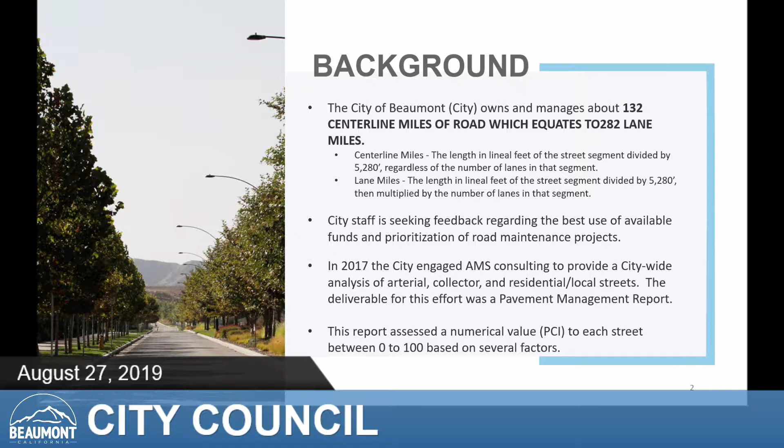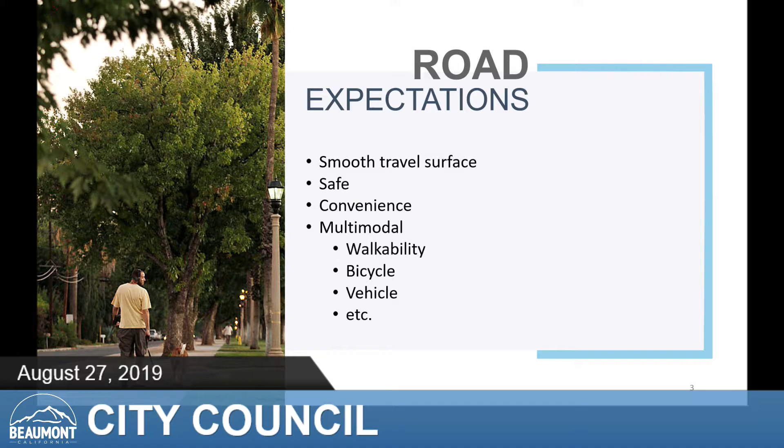So road expectations - what are our expectations? Typically they're for a smooth traveled surface, they're safe, they're convenient, and more these days they're multimodal, meaning they're not just for vehicular traffic, but encompass walkability, bicycling, public transit, and several other items.

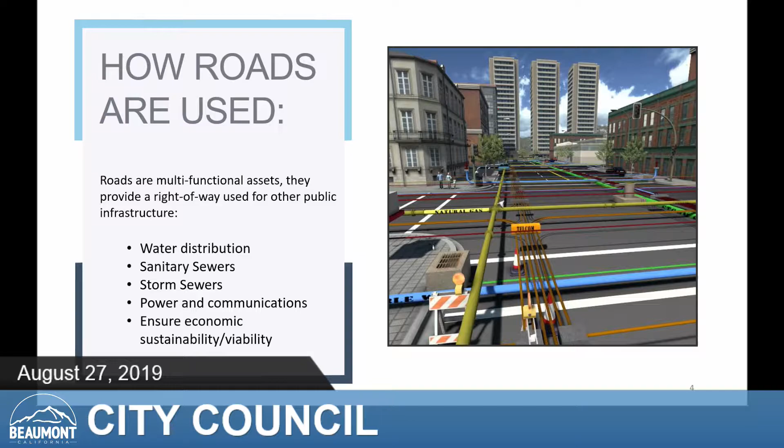as far as the analysis for the pavement management, they identified, based on each road segment, how they're quantified in the tabular support for that PCI report. We end up with about 583 residential segments, 55 arterial, and 76 collector.

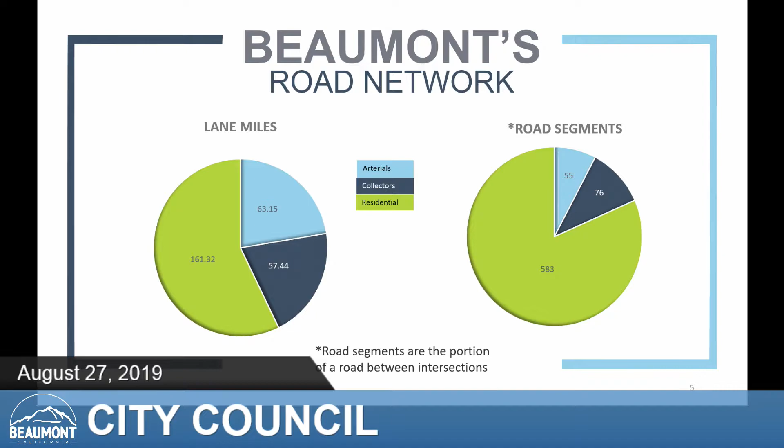So which is which? The arterials, from major arterials, would be streets like Highland Springs, Beaumont Avenue, 6th Street would be an arterial, Oak Valley is an arterial. They're high-capacity roads that typically connect collectors to interstate freeways. They would have an ADT, an average daily traffic, of anywhere from 15,000 to 50,000.

On the next step down would be the collectors, which would generally collect and provide connectivity from arterials to local streets. Those roughly have an ADT of about 5,000 to 15,000. And then lastly, we have residential local streets, which serve all the neighborhoods that we have and can serve anywhere from 1,000 to 5,000 daily trips.

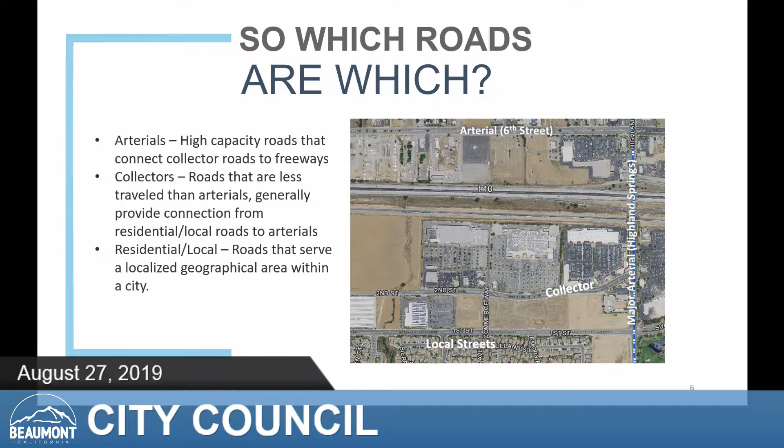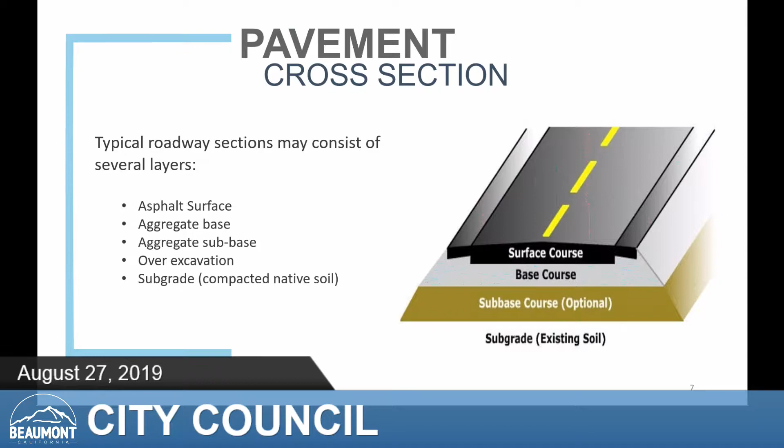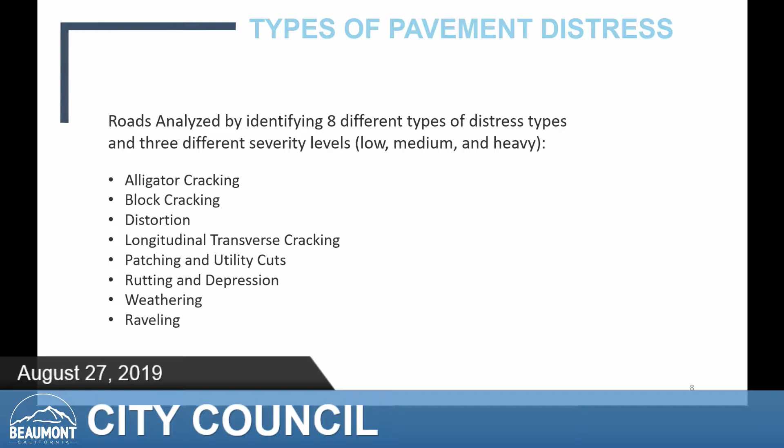Referring back to the PCI report that we did, which is pretty much industry standard, they identified 8 different distress types, consistent with ASTM standard, and then rated those in terms of severity from low, medium, and heavy. Those distress types are alligator cracking, block cracking, distortion, transverse cracking, patching and utility cuts, rutting and depression, weathering, and raveling. We'll go into each one of those in a little bit more detail.

So the first is alligator cracking. It's labeled because it looks like reptile scale similar to the alligator's back. It typically will start with longitudinal cracking parallel to the center line, and then the induction of transverse cracking will create this web look. Left unchecked, it becomes real problematic.

It allows water to seep through, and if it's left unchecked long enough, it gets into the foundation and can lead to a complete remediation. It's a typical great indication that the street is failing.

If caught early on, some streets may be susceptible to a slurry seal in order to minimize it. It may not be the best course of action, but it can certainly prolong the life of that street.

But generally, if the cracking remains within only a few inches deep, we would recommend the street for a mill and overlay of about 2.5 inches. And in moderate to more severe conditions, we would be looking at a full rehab, which would be a new base course and a new paved surface.

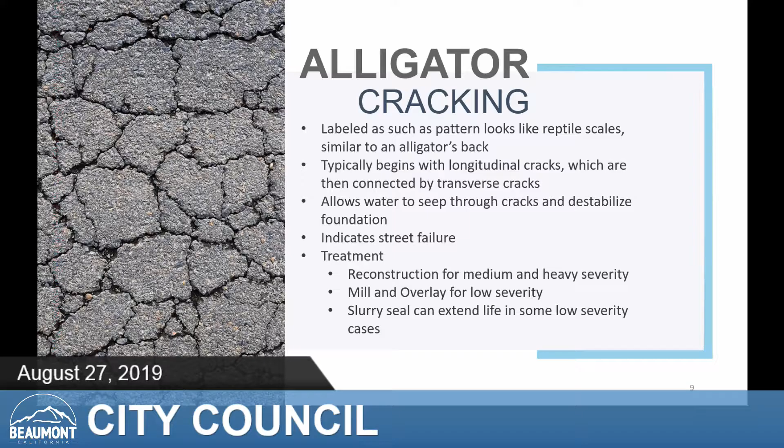We don't have a ton of that here, but it does occur. It's not associated with load or the traffic itself. The preventable measures ensure proper compaction, specifically in the base courses. If you are susceptible to high temperature differentials and poor compaction in the base courses, you can see block cracking.

The recommended treatment for these would be, if the cracks themselves are less than a half inch, we would look for crack sealing those. If they're larger, we would look at a grind and overlay milled surface.

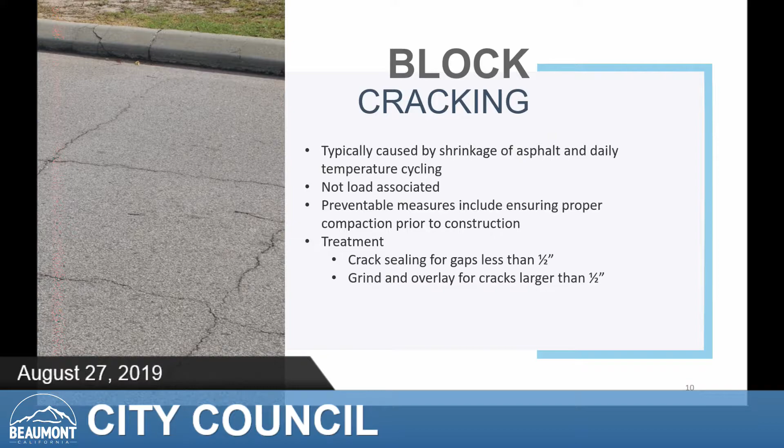This is routinely seen at arterial intersections where there's heavy truck traffic, and when it gets really warm, you'll see it. Overweight vehicles, sudden stopping will really have an impact on this. It's really in the warmer climates where it's a problem.

A lot of the desert communities, you'll see that they will actually concrete their intersections, and not only will they concrete their intersections, they'll concrete maybe 200 to 300 feet either side to minimize this. Concrete is one means of R&R. There are some utility concerns that come with that and the accessibility long term, but it is definitely one way of proceeding. Depending on how severe it is, we would look for localized spot repair, if possible.

If it's minor pushing and shoving, maybe an inch and a half to 2 inches, something like that, we could look for a mill and overlay. And if it's just prevalent throughout the whole intersection, it would be a complete R&R, either with all new asphalt surface, or at that time we would assess whether concrete would be a viable means of proceeding.

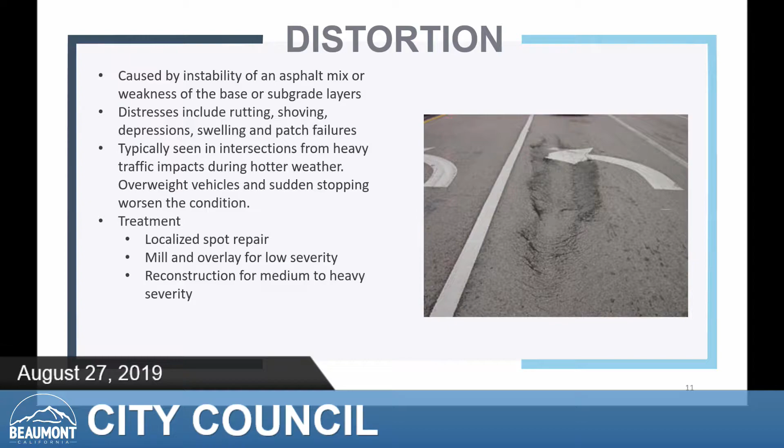Patching utility cuts. This is obviously a big problem in any city. This is caused by both new construction and new services required, but also the maintenance of existing facilities and replacement of utilities that are underground.

It's imperative, at least from a city perspective, that in our inspections proper trench construction standards are followed. A lot of times we'll see settling when they fail to follow what we call a T-cut trench, which minimizes the subsidence you'll see there. Depending on the amount, this would be susceptible for a mill and overlay.

Some of the things we're looking at as staff to minimize the prevalence of this moving forward include installation of a pavement moratorium on newly paved streets for 3 to 5 years, and an update to our city specifications and trench standard repair. I think both of those things combined will make a big difference in minimizing this occurrence.

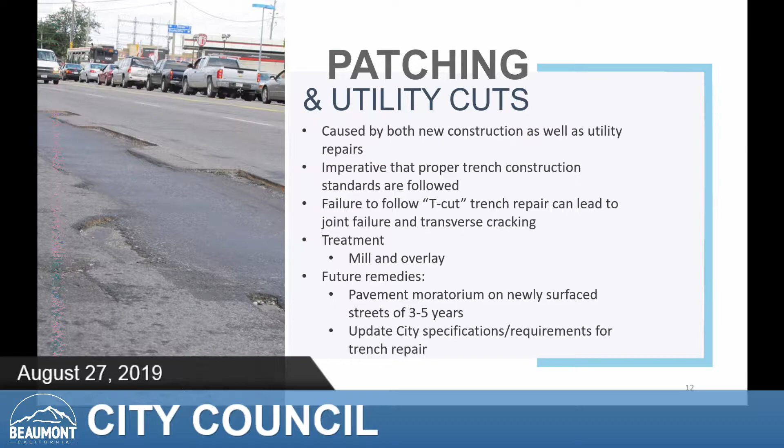Longitudinal cracking, just as they sound, are cracks that are parallel to the pavement center line. They don't turn into alligator cracking per se. They're usually a result of fatigue and/or poor joint construction.

Treatments will usually include a crack seal and slurry for minor cracking, and a mill and overlay for somewhat more moderate cases. In some instances these may benefit from the installation of a geosynthetic grid, which would be done in the actual mill and overlay process. It would go on top of the mill and under the overlay, which helps keep some of those cracks from reoccurring in the future.

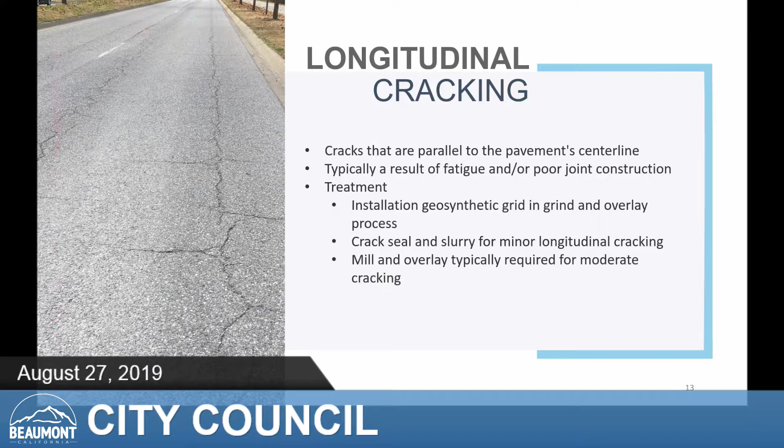Rutting and depression, similar to distortion, though usually over a longer segment. A telltale sign of this is that you see a wheel-defined pattern in the asphalt itself, over a much longer duration.

It's usually a result of poor compaction and improper temperature during placement, as they don't get it hot enough when they're placing it, and they don't achieve the compaction that they need to. Then when it does get hot on hotter days, it tends to shove and push to the side.

Smaller deviations for this longer rutting can benefit from utilizing slurry as somewhat of a leveling course to help extend their life. For low to medium severity, we'd look more towards a mill and overlay, and for moderate to heavy severity, we'd look at complete reconstruction of the base course and pavement.

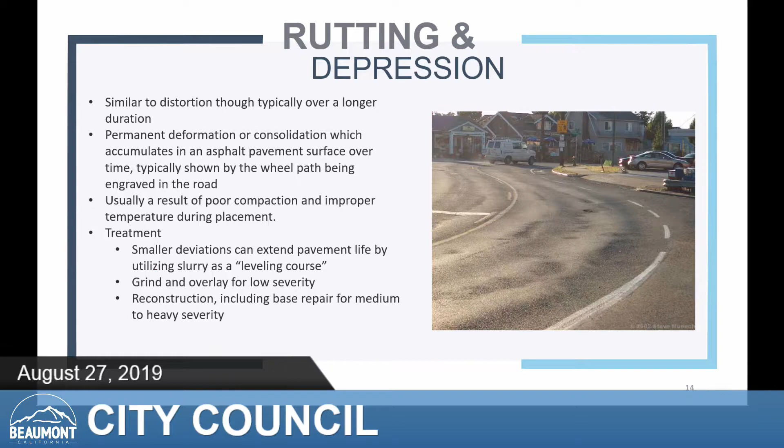If left unmaintained, it will begin to unravel, moisture will begin to get in, and it will deteriorate rapidly. Typical treatment, if caught early enough, a slurry seal is actually fairly effective for lower severity weathering. If left unchecked a little bit longer, then a mill and overlay would most likely be recommended.

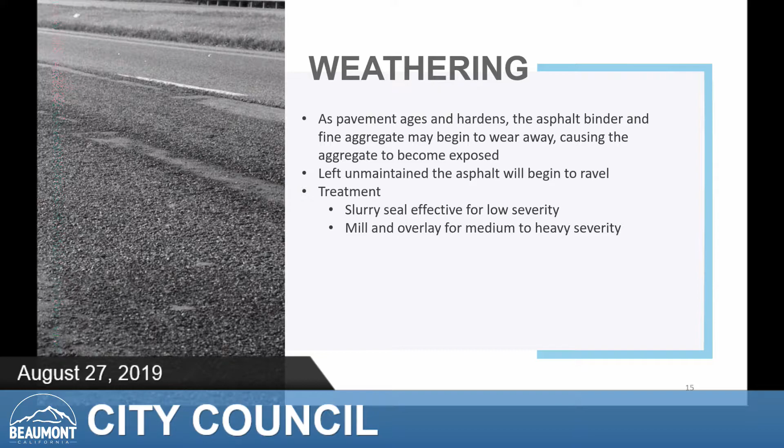The pavement management program: the pavement management plan is designed to provide a better understanding of the city's pavement condition and develop comprehensive pavement management strategies for future maintenance.

Some of the goals of the pavement management program undertaken were to develop an inventory. As previously stated, they did a complete citywide inventory and analysis of every single city street in place at the time, collecting consistent, complete, and accurate pavement condition data, which entailed full on-field surveys, measurements of each street segment, and the monitoring of the existing network.

There are some benefits that come out of that. It allows staff to prioritize and schedule future maintenance road projects utilized in capital improvement projects. It provides the budget needs in order to achieve a certain maintenance goal or a preferred network pavement condition index, and it predicts some of the future conditions and costs associated with instilling the program.

Mayor, may I ask a quick question? Yeah, workshop, we can jump in. Okay, so before we go back, I just had one question on your descriptions of all the different types of disrepair.

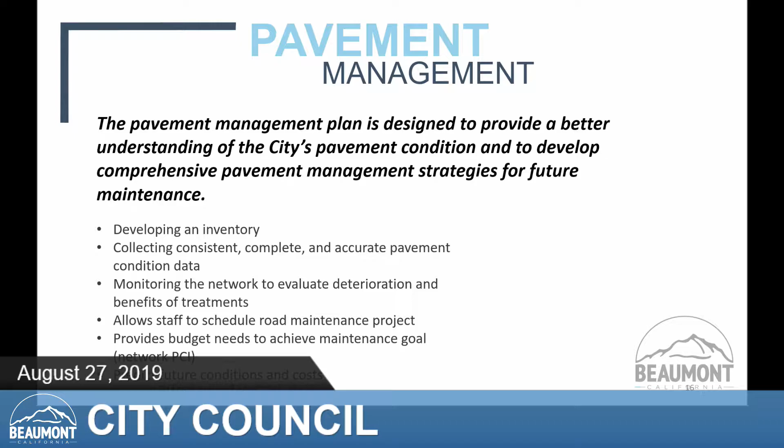You mentioned a future remedy was a pavement moratorium on newly surfaced streets. What do you mean by that? We would look to present an ordinance in which any newly paved or surfaced streets would not allow new utility construction for a period of 3 to 5 years. That's what I thought. Okay, thank you.

Unless directional drilling is used to avoid cutting into the surface. They would have some options. Obviously they're more expensive options, but you wouldn't have the cuts in the pavement. You would do a directional drill.

They would pre-plan it. If they did it and needed to open cut, you could require a full mill and grind, overlay of the pavement section. Obviously, again, more expensive for the utility, but it preserves the life of your street.

Got it, and that includes us as well. Yes, we would follow the moratorium as well as our own practice.

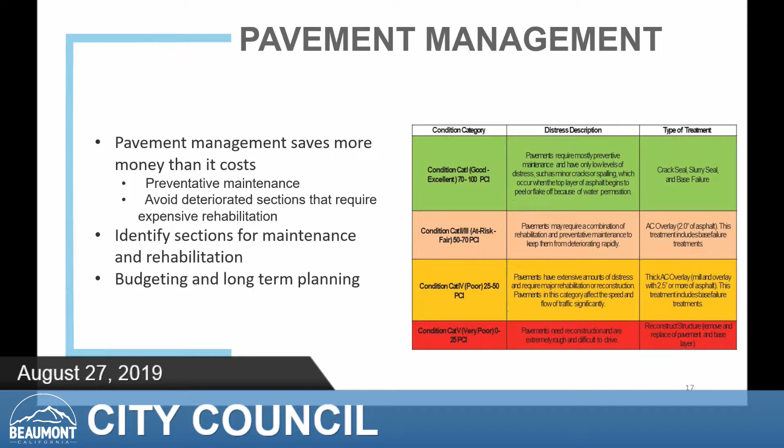Okay, so when you look at the pavement condition index, and I like the way you've broken it down, but will any of those numbers in that index determine whether or not you need to core a road to make sure you know what the sub-base or base is? Yeah, generally speaking, these would equate to the recommended treatment method, and anything we would reconstruct, we would look to core those.

For instance, we brought the Michael Baker contract, and we're now underway for a portion of Beaumont Ave to be completely rehabbed. So they went out and cored samples, and we should have that report here any day. So in those instances, yes.

It wouldn't surprise me, based on the limited as-built that we have and some of the conditions we found, not only there but Oak Valley itself, if base doesn't even exist. We've gotten into situations where it's very slim, thin amounts of paving and it's right on native soil. So it's no wonder why they're wearing in the way that they are.

So can you use geotechnical materials or geogrids to help offset that, or do you just have to go in, take out, and then redo?

Yeah, if it's gone far enough, it's putting a Band-Aid on essentially, and it's somewhat of a costly Band-Aid, because if the subgrade and the section has failed, then it's going to shine right back through, regardless, even if you have a geogrid. It's going to be more uniform in the way that it fails and settles, but it's still going to fail.

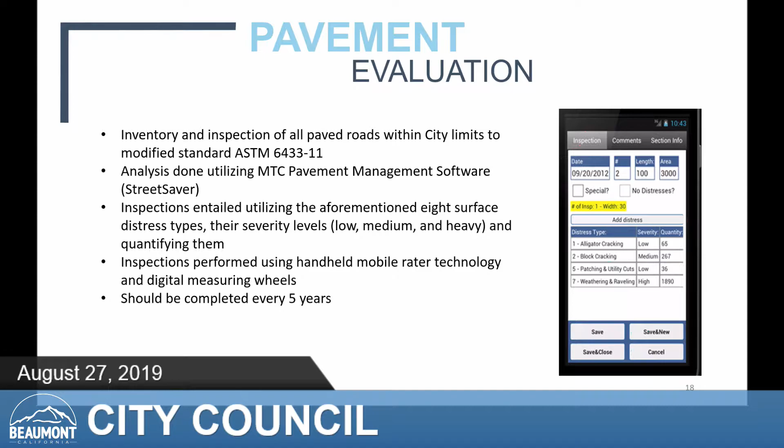So the current PCI, based on the report, the city's overall PCI is 71, which is good. There are some things that play into that, and one of the main things is the majority of the streets we have within Beaumont are residential streets, and a lot of the residential streets we have are new. So they are skewing some of the numbers up a little bit, because where the streets are good, they've been good for a while now, but where they're bad, they can be really bad.

And so there's kind of two extremes happening throughout the city. We've got a lot of the newer ones considered in good condition, 70 plus, a lot of them even 80 plus. And then, more prevalent to the downtown and industrial areas, we've got some significant failures. The collector average is down a little bit to 65, the residential is a little bit higher at 73, and the arterial is pretty much right on it at 70.

So about 75% of our streets fall in the good range right now, and depending on how long we defer future maintenance, that's how long we may stay within that range. 10% fall in the at-risk to fair range, which is 50 to 70, 7.5% in the poor range, and a little less than 8% in the failed range.

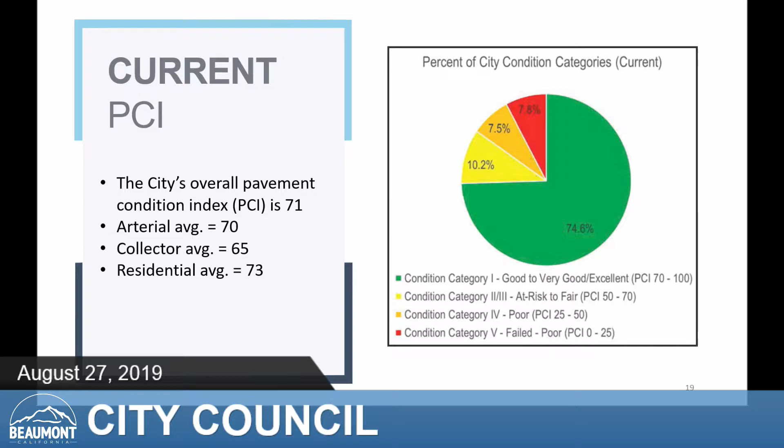Cherry has just recently had some plans approved from a party to have that done. So soon they will be undertaking an upgrade to Cherry from Cougar to Brookside. The developer's on the hook for Highland Springs as well, so that will be developer funded.

There's some recent segments that the city has actually done that could be reflected here. Oak Valley Parkway from Beaumont Avenue to Cherry has now been upgraded with the grind and overlay, so that segment would be green.

Xenia was a complete R&R, and 8th Street was a complete R&R. So as we look at the maintenance cycle on these, and Todd will talk a little bit more about this too, we talk about a 10 to 15 year life on some of these. A lot of the streets that are in the green are going to start pushing that pretty soon.

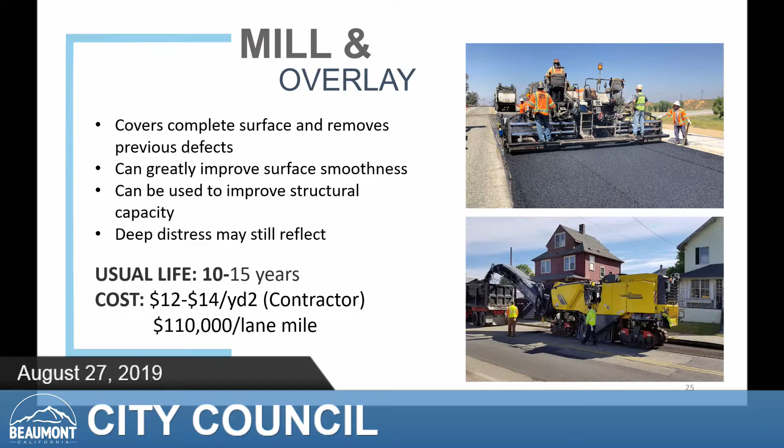And then last, we have reconstruction, which is kind of a last resort, but it's a full depth rehab. We would look at removal of any existing base, removal of the pavement layer, and then recompaction of the existing subgrade. If the subgrade is what led to the failure in the first place, we may look at over-excavating the existing subgrade 12 to 18 inches. All further reasons to have the geotechnical analysis to make proper recommendations moving forward.

But it's a complete replacement of the street, and that is about $500,000 per lane mile. It's hard to quantify because it's not a set thickness we're doing, and it's contingent on the recommendations from the structural analysis. You may have one street that calls for 6 inches of base with 3 inches of asphalt, and another that calls for 8 inches of base and 6 inches of asphalt. You could have two vastly different sections, but as a rough rule moving forward, it's about $500,000 per lane mile.

Do you have some streets off the top of your head that would need full reconstruction at this point? Beaumont is the main one that comes to mind right now. There are others, but Beaumont would be the main one. And Xenia, we recently did—8th Street was a complete reconstruction. So those are some recent ones that were done, and Beaumont's the one that's planned right now.

The bang for the buck is a little bit harder to justify. There are streets that definitely warrant it, but it is very costly.

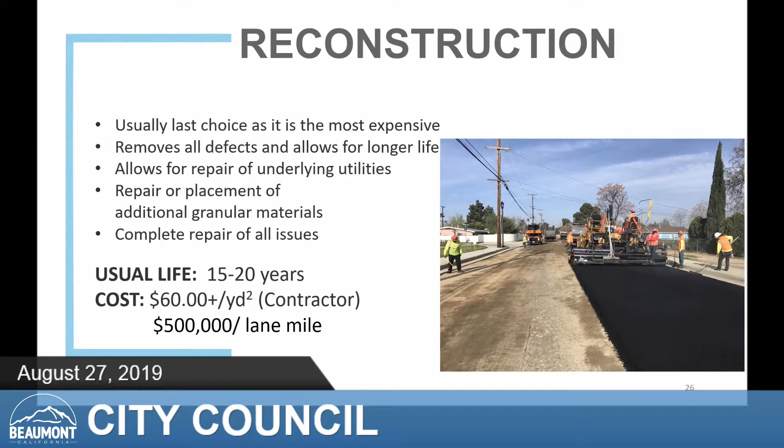Where you're going to get the difference in the base and the asphalt will be the type of street. So anywhere we're running heavy traffic, 4th Street's a great example—4th Street has heavy traffic now that we have all the industry, versus a residential street. So that's going to call for a different pavement and base than, say, a residential street might.

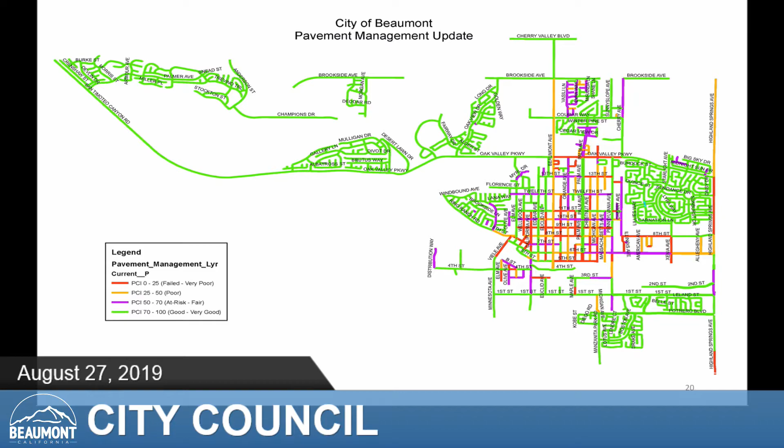So until we get those in, we will bid it in a fashion so that we can maximize the available funds that we have. But it's inclusive of several streets susceptible for slurry seal, some for grind and overlay, and then Beaumont Avenue itself. We also went to get approval to do the design for all of Beaumont so we can more accurately plan for future year expenditures, knowing that we will only be able to construct a portion of Beaumont Avenue this year, and we'll have to kick some of the future construction to future years.

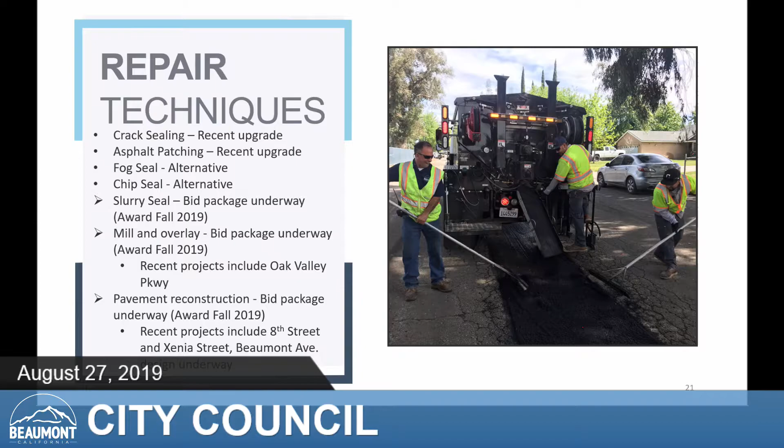And for 22-23, when you talk in-house, do we have the proper training now? Do we have additional training needed for our personnel? No, I think we're well-trained. Yeah, absolutely. And how about the equipment? I'm not talking about additional, but the equipment we have—good? All right, that's what I want to know.

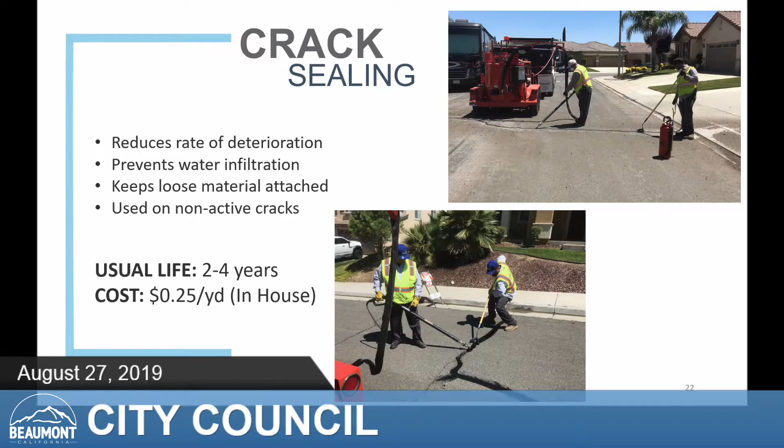That's actually a picture of your stuff right there. Yeah, I know, but I just want to make sure there's nothing additional we don't know of, so they can have everything they need to do it right. On slide 21, that's kind of essentially all your tools in the toolbox—everything you could do from a street perspective.

Some of these, you obviously probably would not want to do a chip seal in the middle of a residential area. Chip seal comes with its own set of cons—it's noisy, and it doesn't have as long a wearing surface as, say, your grind and overlay. So we're going to try to pick and bring you the best application we believe gives the least amount of money for the longest longevity. And you said that on Beaumont, you're going to keep in mind what we can do in the future.

What part of Beaumont are you looking to do first? Well, like I said, we're having the whole part designed, so we need to see where the engineer's estimate comes in before we plan some of that. Like between 5th and 6th is going to be an entire reconstruction.

Not all of Beaumont is in need of a complete reconstruction. There are portions that are only in need of a mill and overlay. But for the reconstructions, it's 5th and 6th, so that's in front of McDonald's and Baker's. And there's another segment too, I don't have it off the top of my head.

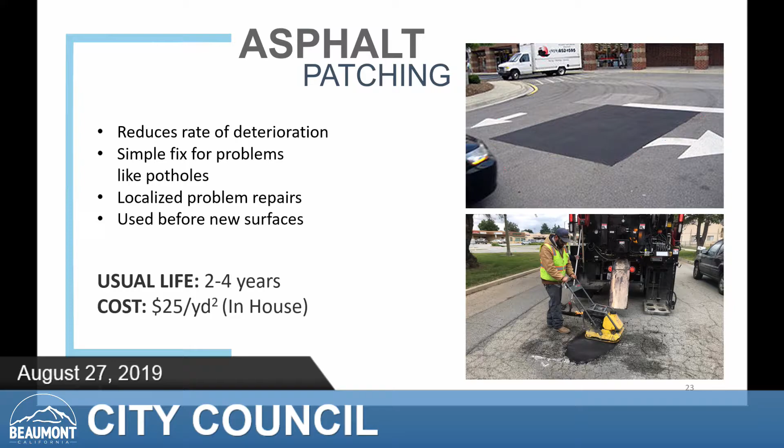There are two segments we were hoping to get done now, but the cost, especially due to the width of the street itself, is going to be so extensive. Because if you look at lane miles, if you're looking at one lane mile in a four lane road, that's really only a quarter mile as the crow flies. So the amount that you can do is significantly reduced due to the overall width of the road.

I hear every day about the one on Beaumont Avenue going up to the high school. That's coming up later in our discussions, because that Beaumont Avenue is pretty big. So we're doing the section down here south. We're going to talk later about where that northern part fits, as far as resurfacing or widening.

Beaumont Avenue went all the way up on the map towards Brookside, which is right where the high school is. Yeah, so that's not a complete rehab. There's portions of that that need a grind overlay, and there's portions that I think would see benefit from just a slurry seal.

On that note, there were a few people that brought up some questions at the State of the City with the community, talking about the area around that high school on Beaumont Avenue. When we talk about redoing the streets, are we also thinking about whether there's going to be any changes to that street? I'd hate to slurry it and then tear it up again.

As far as right now, we're limited pretty much to the use of the funds we have, so it's not for expansion or widening projects, but solely for resurfacing. I'm not aware of any plans to widen those sections in the future.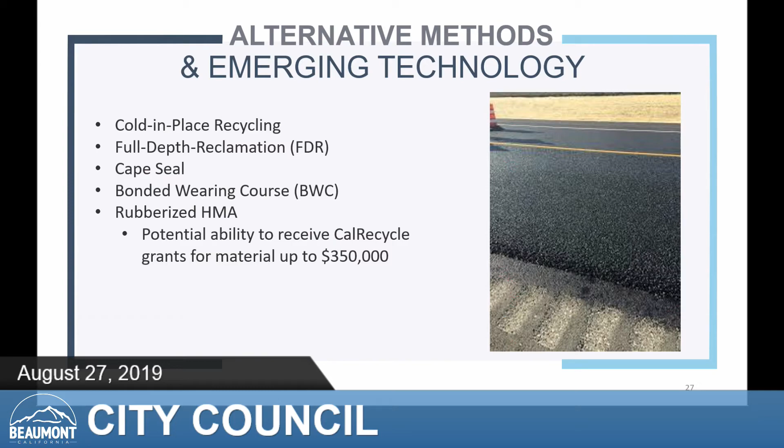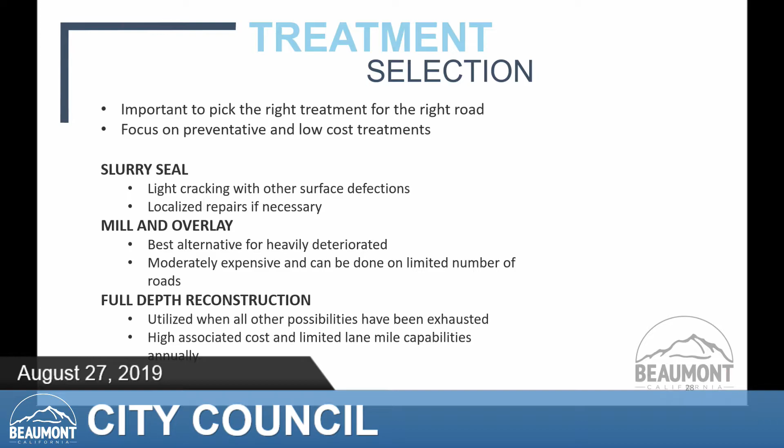And then let's have Todd speak to some of the budget analysis.

Oh, thank you. So why is it whenever an engineer says we're going to use polymer, you're thinking, yeah, let's use polymer? Why is that? I get excited — y'all ever feel that way? Yeah? Okay, Jeff said he used polymer toothpaste. It's like, where do I get that? Thank you, it's not being legit.

So when we did the pavement conditions analysis, one of the things they looked at was how much the city was actually budgeting for road maintenance at that time. We were not yet in a position where we had fully stood up our in-house street maintenance crew — we basically had 2 people out of community services throwing down cold patch and driving over it with the rear tire of the dump truck. We've obviously progressed since that point, but that's really what this looked at.

If we'd stayed on that track, we would have been spending $500,000 a year, and we would have seen significant degradation of the existing roadway network, because more of our stuff would fail and the newer stuff would continue to age, with not enough money to adequately maintain and reverse that. Whenever we apply a treatment to a roadway section, its score goes back from 60 or 75 up to 100, and then the depreciation process starts again — which is why it's critical for us to redo these studies periodically.

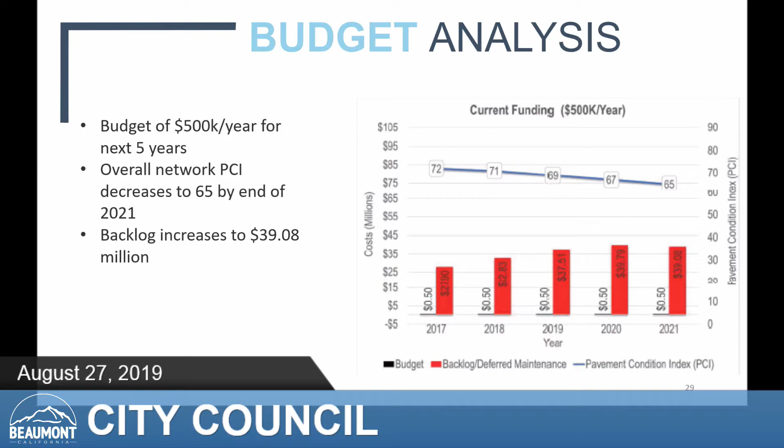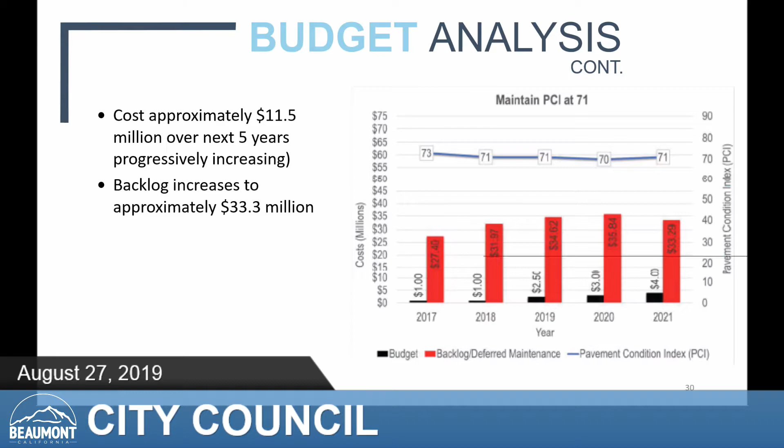So then we looked at an analysis of what it might take to basically keep status quo — what level of investment would have to happen. We looked at $1 million for the first 2 years, then ultimately growing to $2.5, $3, and $4 million. That would be the baseline strategy just to stop the degradation, but you're not making headway as you move forward.

Ultimately, what level of effort would we need in order to make a little bit of upgrade? With a $7 million initial investment, we get ourselves up to a 76, and then it takes $3 to $4 million a year every year thereafter in maintenance dollars in order to keep you at 76.

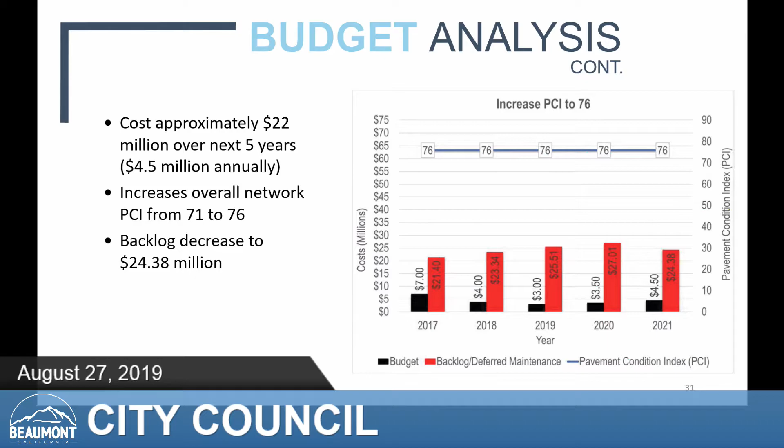So to run through some numbers, if you go back to one of the earlier graphs Jeff showed you, that pie chart showed the different colors and where we were in different stages. If you look at the failed section, about 7.5% of our roadway network, that's 21 miles of failed. The significant at-risk streets were 21 miles, and poor was another 21 miles. So you're at a total of 63 miles between failed to poor condition or at risk. The most current numbers we have show $13.6 million is what it would take in today's dollars to address all that. So you're trying to fix 63 miles at one time, which is a ton of lane miles to address. You're talking somewhere around 30 or so miles of street that would actually be maintained during the course of that work.

One of the limiting factors isn't just the time of year and seasonal issues, but also coordination with other utilities. For example, Beaumont Cherry Valley Water is working with Jeff and his crew right now to look at utility line relocations up Beaumont Avenue. They know they have some conflicts they want to relocate. So as he's planning and programming, he's also reaching out primarily to Beaumont Cherry Valley Water to get things out of the way so we don't repair something and run into a problem.

One of the issues we really ran into with the 8th Street reconstruction program is that we had water lines and services probably within 2 feet of the surface. Our original bid had us paying $750,000 to relocate those, but the Water District actually came in and relocated those services and lines for a third of that price. They still weren't able to locate them deep enough in some areas, so we couldn't do the full depth we wanted and had to use alternative approaches to get that road reconstructed. We're going to run into those issues all over the city, whether it's base material, pavement over dirt, or utility lines not located deep enough that need to be relocated.

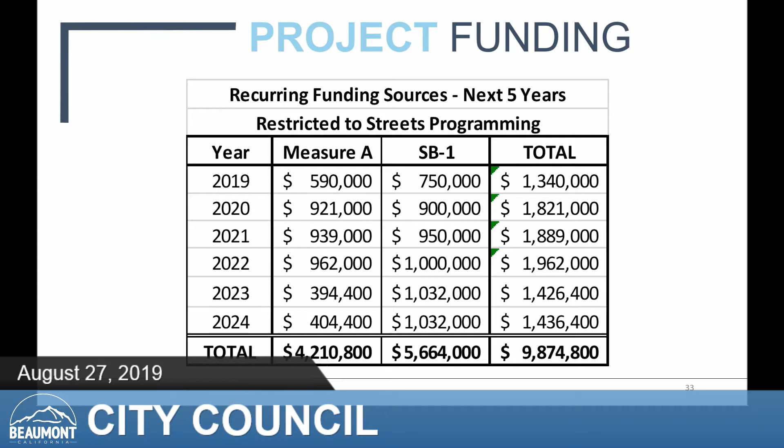At the end of the day, I mentioned we had $13.6 million identified in the last pavement condition index study, and you've got $9.9 million in the next 5 years. So it comes down to the question of what that balance is, what we need to do, what council wants to do. You've already talked tonight about some other major capital needs that are out there—how do we consume that, and how do we really tackle it? If you look at roughly $1.5 million being available to you a year, that's a little faster than what the 5-year forecast originally called for in the initial years, a little less than some of the outer years, but getting toward the same number.

So as of today, with a base level of maintenance, which basically keeps your PCI at 71, you're looking at about $1.4 million in terms of that maintenance cost. Again, that's just holding the line. It's not taking care of any deferred maintenance issues that are out there necessarily.

So what you're looking at is 14 lane miles of slurry, about 4 lane miles of mill and overlay, and then your reconstruction is about a lane mile. So if you actually look at how many actual drivable miles that would be, that's about 8 to 9 miles, depending on the condition of the streets that we're trying to rehab.

So if you start to look at the catch-up scenario, you say, okay, if we want to try to catch up within a 10-year window, how much would we need to do, and what would the benefit of that be? Scenario 1 brings you up into about an 11-year maintenance cycle. Not necessarily means that you're going to fix everything in 11 years. What that really means is for major maintenance, you're coming back to a street every 11th year.

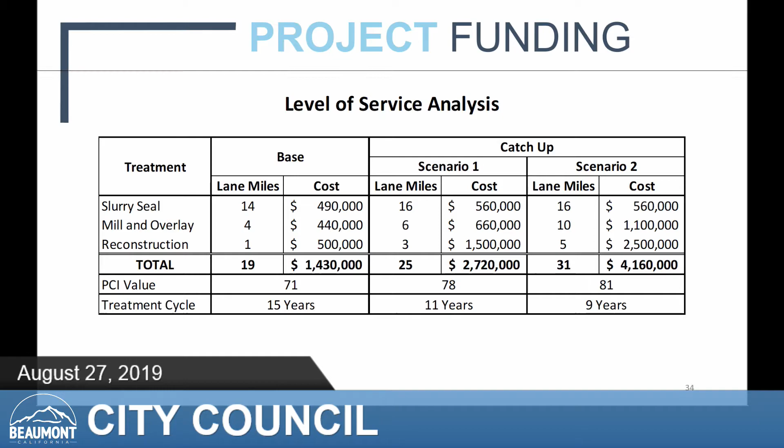What you can see that we pick up between these scenarios is really the mill and overlay and then the reconstruction. So those two elements are things that we would advance significantly under this program. So again, when I talked initially about balance, this is kind of what we're talking about. This is the overall balance that you have, that you're trying to walk between what is it you would like to see as a council and then how much resource do we have or are we willing to bring to bear.

So what does this mean in terms of the overall dollars? If you look at the 5-year investment requirement for the base, you actually have about an additional 1.7 million potentially if our revenue projections hold. One of the things to remember is that with our CIP, we said we're not going to spend those sales taxes, particularly the SB1 and the Measure A, until we know that we have them. So we show that revenues coming in for 19 really will reflect what we'd collected through the 18-19 fiscal year, and they come in for expenditure in 19. So these reflect prior year revenue projections rolling forward into next year.

But you can see when you get to 2023, that's when you basically hit your break even in terms of your annual revenue that comes in. So you have a period of about 3 years here where you're doing a little bit better, where the bulk of those monies come from. You'll notice too that the cost factor goes up. I've applied a 2.5% CPI factor to those costs, so those are already factoring in CPI as well as our revenue projections.

So again, you see scenario 1, you wind up about 800 to $1.5 million behind every year. And then when you get to scenario 2, you're $3 million a year roughly behind the revenue stream that you would need during that 5-year period.

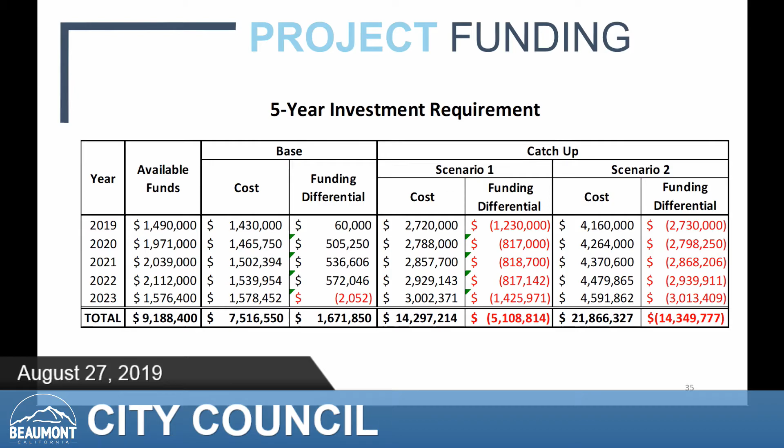Now, it may be putting a slurry seal over a street that ultimately may need to be reconstructed. It may be planned for reconstruction, but at least we're trying to keep the street looking better and driving better than just keeping hands off and letting it continue to deteriorate. We know that's not necessarily the most judicious use of funds, but it's an appropriate use of funds because we're trying to achieve a bigger purpose.

So as Christine and Jeff begin to develop their programming, there's strategies like that they may bring forward that you may say, 'but I thought you said that was alligator cracking.' It is. We're going to do a spot repair, and then we're going to do this for now, with a plan, in the next several years when time becomes available to do that.

So anyway, that's kind of the fiscal conditions and the fiscal balance that we're going to have to look at as we work through this.

So you have enough money coming in to do the baseline, to keep yourself from sliding further downhill in terms of the overall PCI in the system, but there's not enough revenue right now to really make a significant impact in terms of improving the overall condition and to catch up on deferred maintenance that's occurred for many, many years.

So as far as preventative measures, we've actually touched on most of these throughout. We talked about a pavement moratorium a little bit. We do have a draft that we'd like to bring before the council in the next month or so, and I think that will go a long ways towards protecting our streets from future damage.

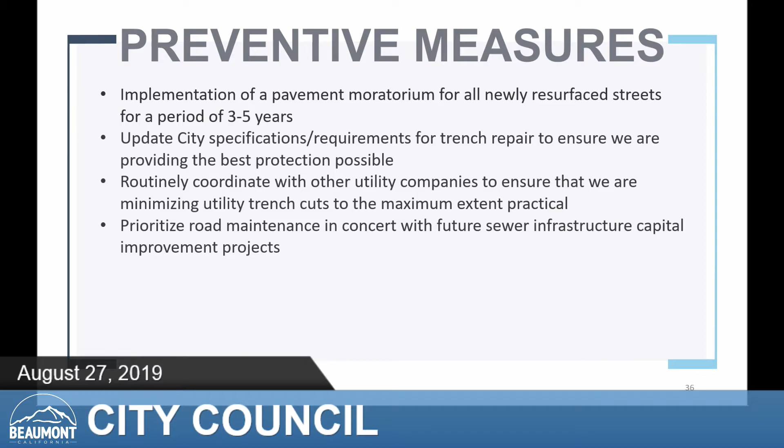In conclusion, we can't stress enough how important it is to perform the right treatment on the right road, at the right time. Obviously, we're all limited by time and funding. In an ideal world, we'd be able to resurface every single street, but as Todd mentioned, it is a balance of what do we have available to us and what's the best bang for that buck, so to speak.

The value in fixing the roads early in the process and minimizing deterioration is key. With the projects that we have ongoing and then the ability to do more and more in-house, we are taking significant strides at minimizing that, but it's a tall task for us to undertake.

Slurry seal is an effective treatment. It just needs to be used as early in the process as possible. Once we start to get prevalent cracking and longer range deterioration, the value is not there. It still has a benefit, but the preferred expected value of 5 to 7 years becomes less and less the longer we neglect it. To keep up progress on heavily deteriorated roads and maintain a well-balanced approach for citywide road rehabilitation.

And that will entertain questions, comments.

All right, thank you for that. Do we have any questions before we get direction and see what he wants us to discuss? Anything on the slides? I think we covered pretty much everything on the slides as we went through it.

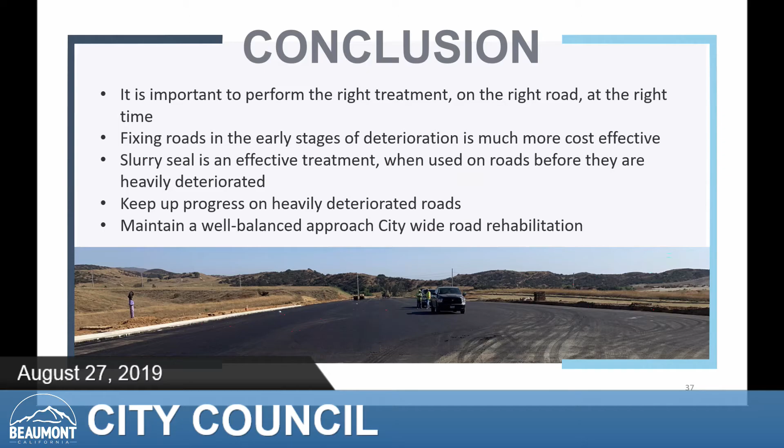Todd, it looks like you're looking for direction and discussion. So what would you like us to discuss? What kind of focus are you looking at?

Well, I guess the overall discussion. When we adopted the PCI study, the pavement management study, I don't recall that we had a lot of discussion about what city council's desired level of service was. What do you want to see as your preferred maintenance of effort? When you look at our financial constraints, it's important to figure out where y'all go and what strategies you want us to look at.

To recap, what we're proposing is a strategy that says stop the bleeding to a certain extent. The best way to do that initially is to get out and do things like slurry seals, so where we have things falling into higher risk categories, we're capturing those, preventing that—it's a preventative effect. The same theory goes along with some of the mill and overlay. Reconstruction is very limited right now because we feel the best bang for the buck is to put it into the preventative side, to prevent more Pennsylvanias from occurring, to prevent more Beaumont Avenues from happening, and then begin to work on those other components.